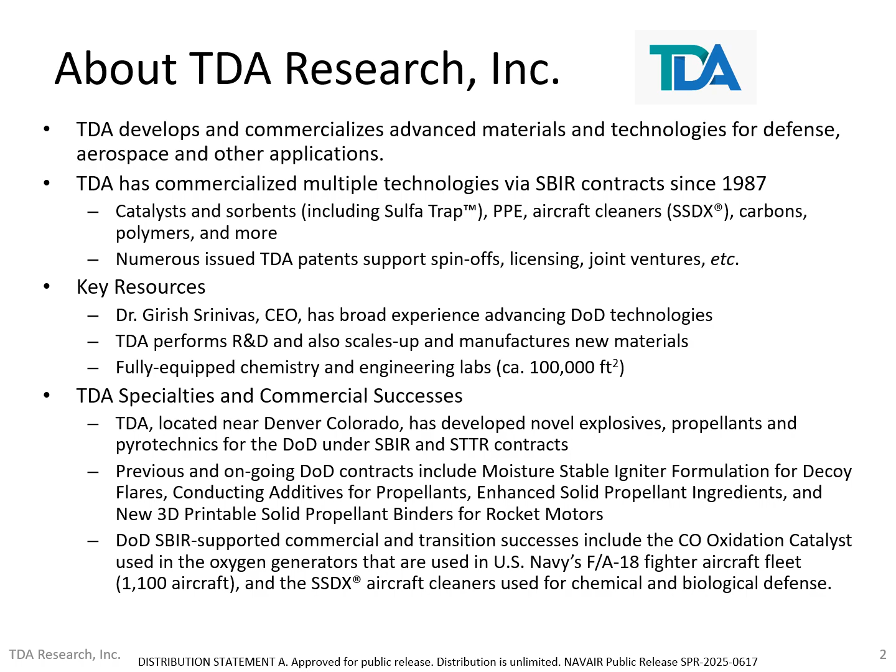TDA has developed novel explosives, propellants, and pyrotechnics for the Department of Defense under SBIR and STTR contracts. These include igniters, conducting additives, propellant ingredients, and 3D printable solid propellant binder materials. TDA's successfully transitioned technologies include the carbon monoxide oxidation catalyst in the oxygen generators that are used in U.S. Navy's FA-18 fighter aircraft fleet, and SSDX aircraft cleaners that are used for chemical and biological defense.

The Navy seeks to use boron in energetic formulations, especially in solid and liquid fuels. Boron is highly energetic but is normally difficult to use in solid and liquid fuels. The Navy wants to use boron as a fuel ingredient to improve the performance, range, and/or speed of missiles and rockets. The targeted technology areas include air platforms, materials, and weapons.

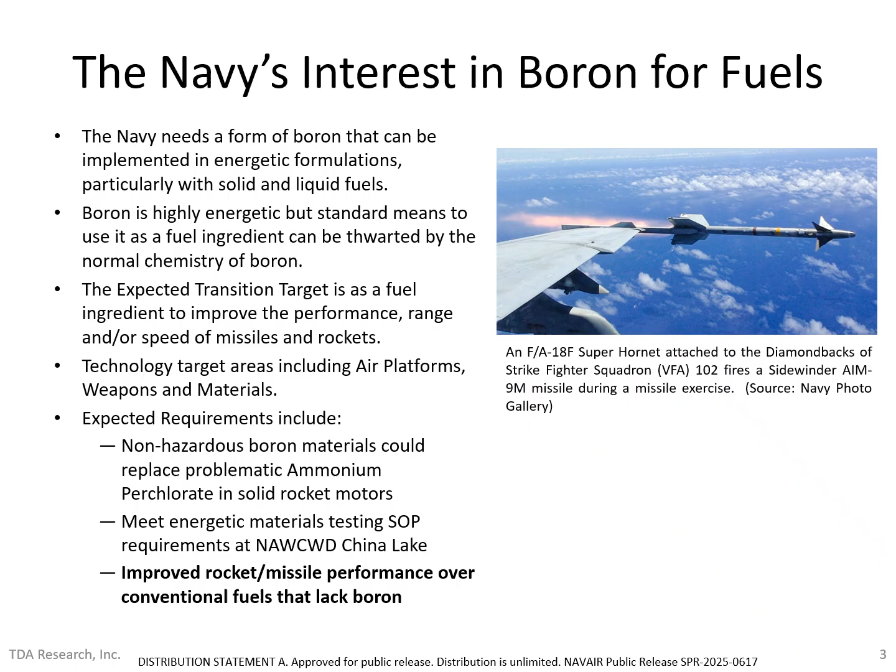The boron materials need to be non-hazardous while working with both liquid and solid fuels. They also need to meet energetic materials testing standard operating procedure requirements at Naval Air Warfare Center Weapons Division China Lake, while giving improved performance over conventional fuels that lack boron.

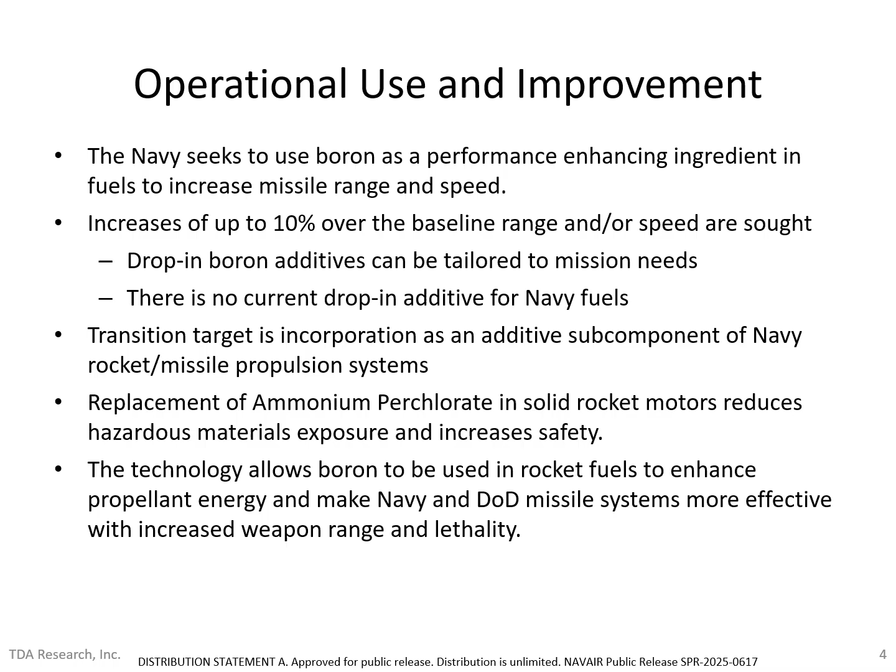The Navy wants a boron-based performance-enhancing ingredient for fuels so that the range and speed of missiles can be increased. The boron ingredients will be additions or subcomponents to a Navy missile propulsion system. The Navy would like to see increases of up to 10% over the baselines in range and/or speed. There is currently no other drop-in additive for use in Navy fuels, and our drop-in additives can be tailored to mission needs. The enhanced performance that results when using our additives will increase the range and lethality of weapons.

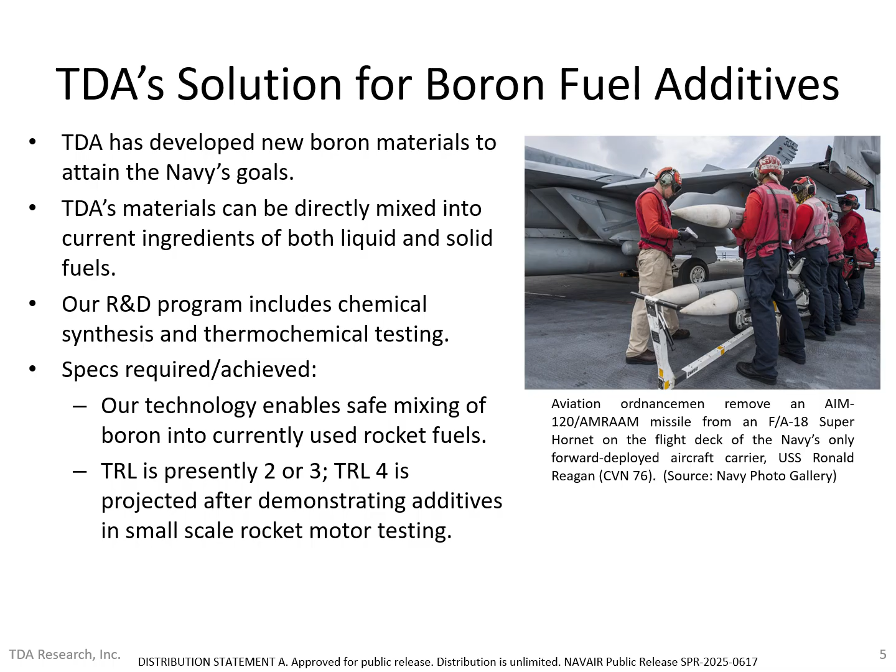TDA has developed new boron materials to attain the Navy's goals. These new materials can be directly mixed into the current ingredients of both liquid fuels and solid propellant formulations. TDA's research and development program includes chemical synthesis and thermochemical testing. Our technology enables safe mixing of boron into currently used rocket fuels for the first time. We estimate that the technology readiness level, TRL, is currently 2 or 3. We expect that TRL will be 4 or 5 after the boron additives are demonstrated in small-scale rocket motor testing.

We are currently working to develop boron fuel additives further. There is more testing that needs to be done, both with the Navy and with a future prime contractor. The TRL will rise after demonstrating our additives in small-scale rocket motor testing.

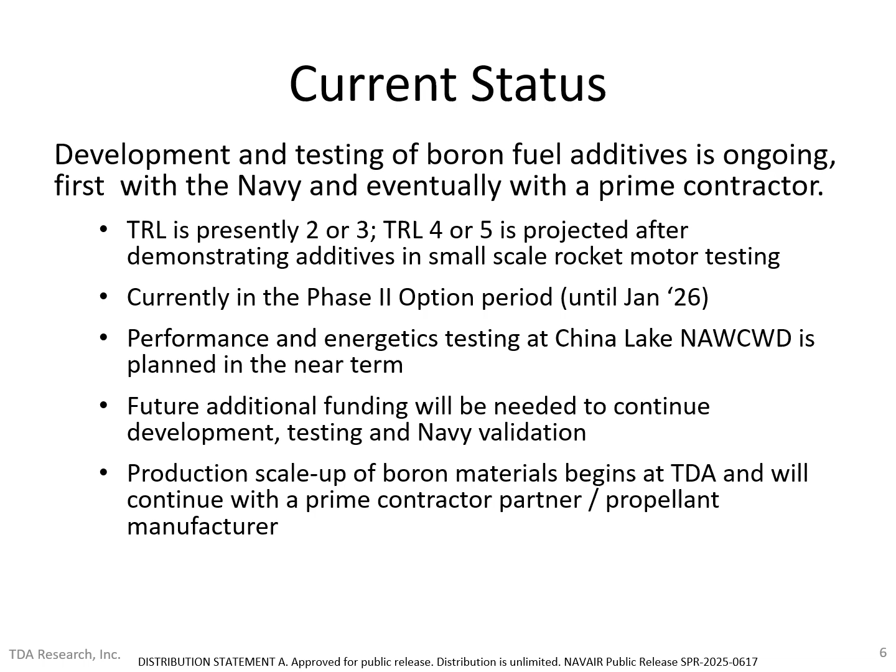Currently, the project is in the Phase 2 option period, which is scheduled to continue into January 2026. We have performance and energetics testing activities planned at Naval Air Warfare Center Weapons Division China Lake for the next several months. We will need additional funding to continue developing and testing the additives, along with Navy validation. We anticipate producing boron materials at larger scales in-house at TDA. Beyond this, a prime contractor will likely continue production of the additives for propellant manufacturing.

TDA's boron-based materials can be directly mixed into current ingredients of both liquid and solid fuels. We recognize that using a drop-in additive with current fuel formulations is simpler to implement than a totally new fuel. This should offer a faster pathway to qualifying their use. There is currently no equivalent competing boron technology.

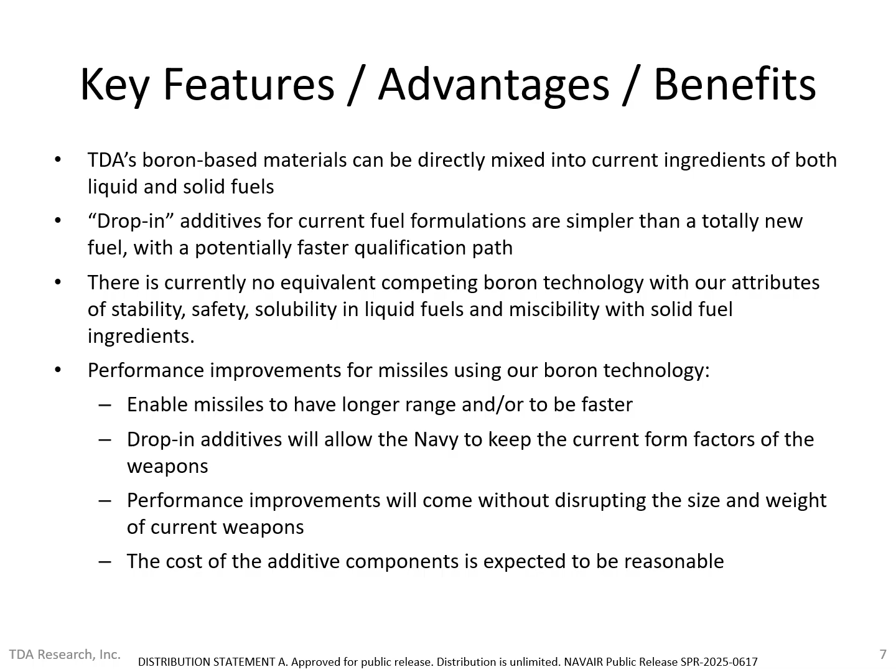Using our boron additives will improve the performance of Navy missiles. The new boron technology will make the missiles faster and/or have longer ranges. The drop-in nature of the additives will allow the Navy to keep the current form factors of the weapons when using them. Thus, performance improvements will come without disrupting the size and weight of current weapons. The cost of the boron additives is expected to be reasonable.

In order to transition our boron additives beyond Phase 2, several things need to be accomplished first. These steps include demonstrating TDA's boron additives in small-scale rocket motors, further testing and qualification in Navy systems, and scaling up additive production and manufacturing. For all these steps, additional funding beyond the first Phase 2 option period will be needed. The main Navy transition advocate is NAVAIR PEO U&W, primarily PMA 201, along with PMA 259. The boron additives will be additives or subcomponents of Navy missile propulsion systems.

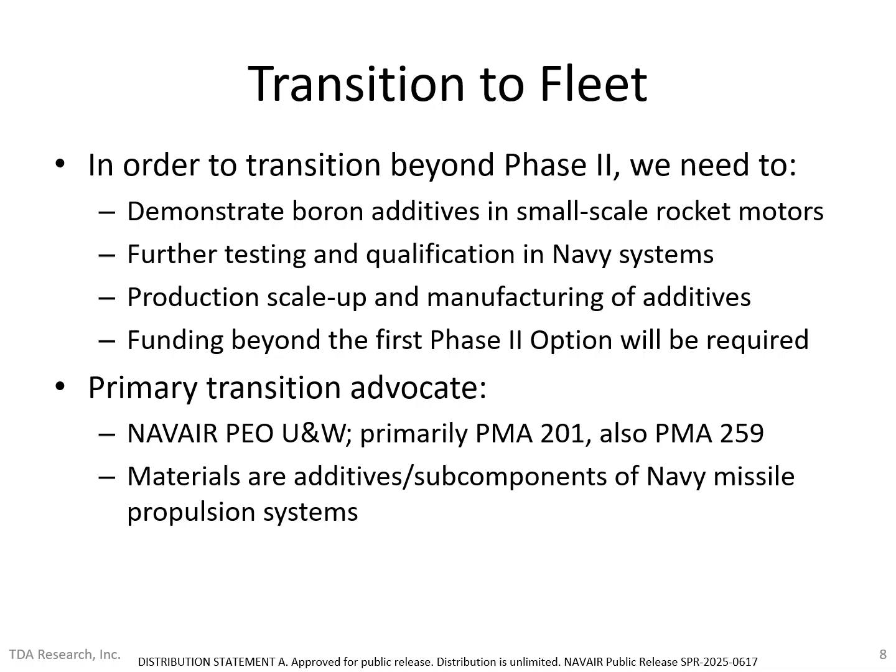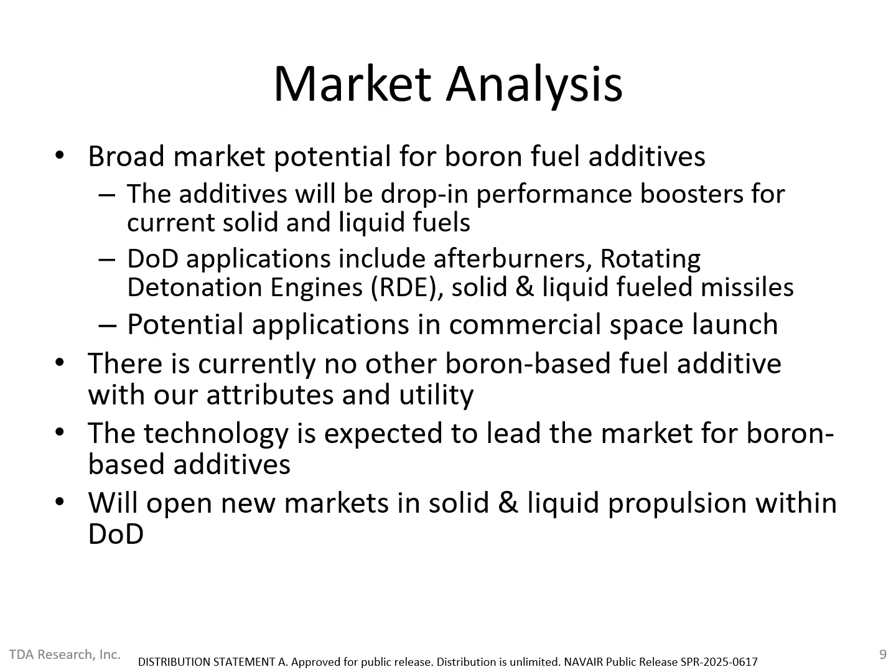We predict that there is a broad market potential for boron fuel additives. The drop-in performance boost offered by the additives with current solid and liquid fuels will broaden their market appeal. Department of Defense applications for the additives will include afterburners, rotating detonation engines, and solid and liquid-fueled missiles. There are also potential applications in commercial space launch for the additives. No other boron-based fuel additive is known that has the attributes and utility of our technology. Thus, we expect that our technology will lead the market for boron-based performance-enhancing additives, while opening new markets in solid and liquid propulsion for the Navy and the Department of Defense.

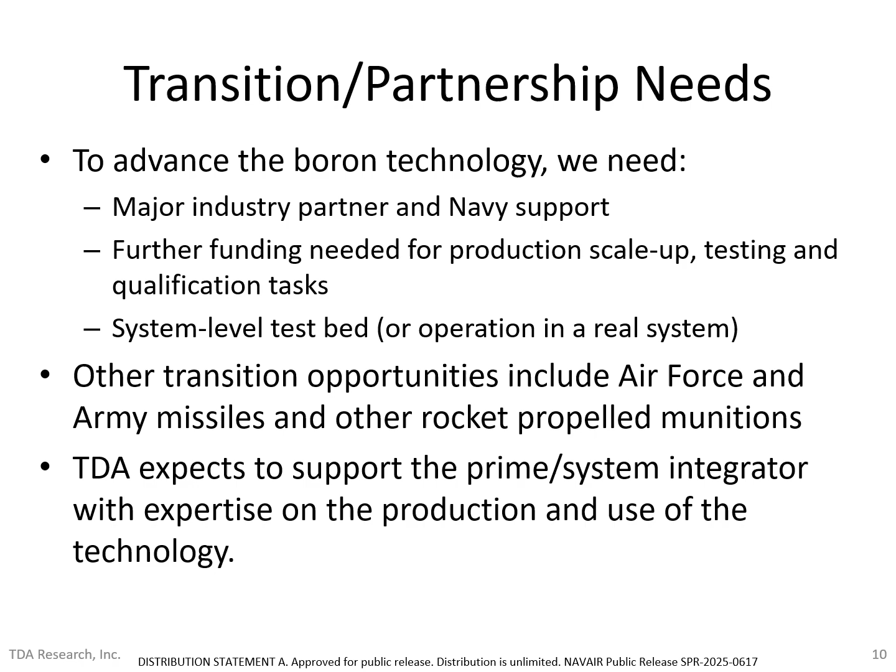To advance our boron additive technology, we need additional support from several areas, including support from a major industry partner and the Navy. Further funding will be needed to conduct production scale-up, testing, and qualifications. Eventually, the technology needs to be demonstrated with a system-level test bed, or in operation in a real system. Other transition opportunities for our technology include Air Force and Army missiles and other rocket-propelled munitions. TDA expects to support the prime or system integrator with expertise on producing the additives and using the technology.

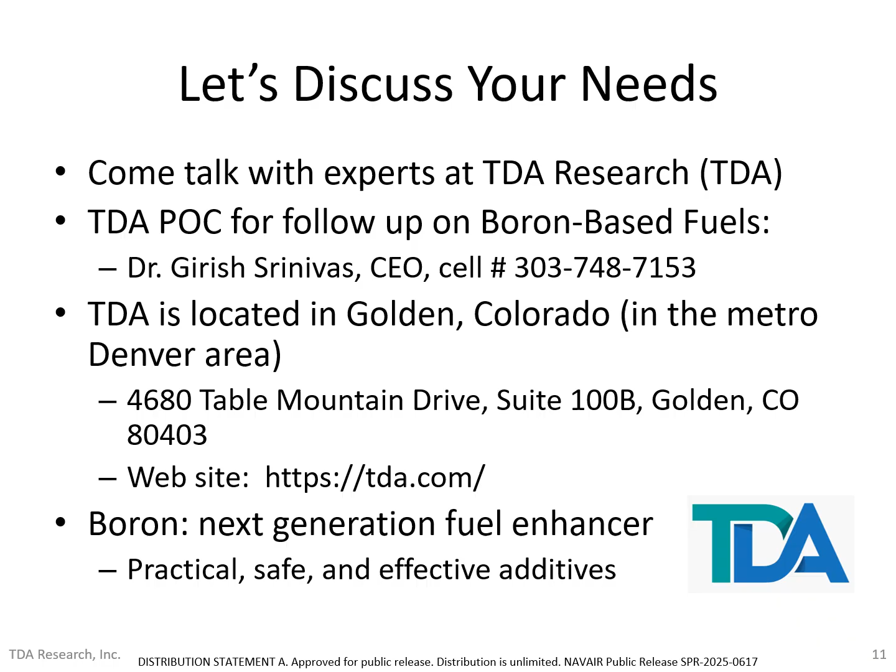Boron is the next generation fuel enhancer. TDA's innovative propulsion additives are practical, safe, and effective. Thank you for your time.